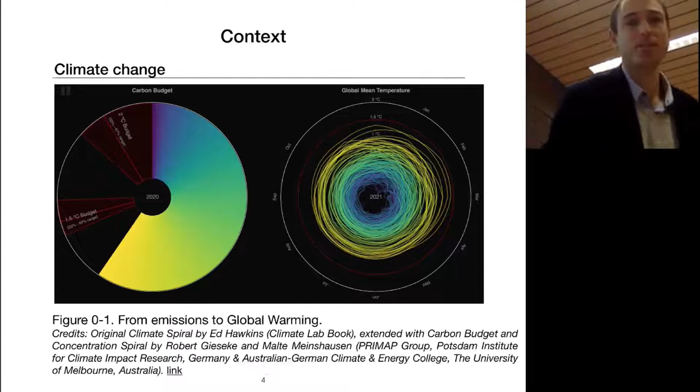So let's first start with the context, and I would like to show you a very small animation. I think it speaks for itself.

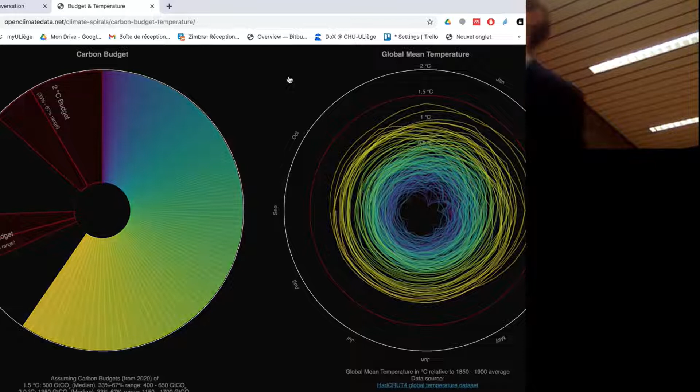On the right part, this is the global mean temperature on Earth. On the left part, it is a carbon budget, evolving across the last 150 years. We can see that across time the average temperature is increasing, and so of course the carbon budget too. Here we are in 2021, and we are this distance from the 1.5 degree carbon budget. At this rate, if we follow the emissions actually produced by all human activity, it should be reached in 10 years if we do nothing. But of course we are doing everything we can to try to decrease CO2 emissions. I think it speaks for itself that on average the temperature is increasing, and I think you already all know that.

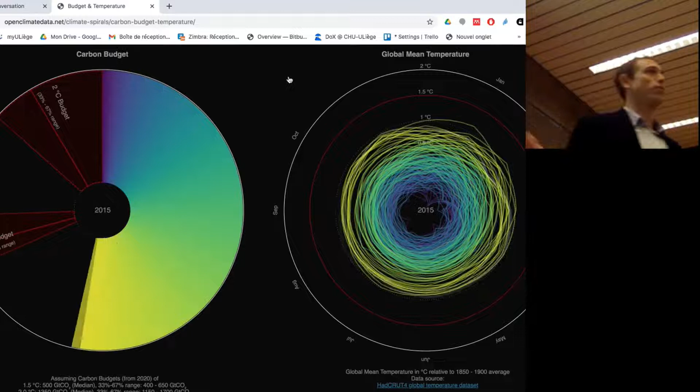Let's come back to the presentation. The world consumption of primary energy is mainly composed of fossil energy, around 84% in 2019 composed of oil, gas, and coal. This is an incredible source of energy, because with it we can achieve so many things. Without fossil energy we could never have achieved planes, informatics, and so much other technology we use today. So they are beautiful sources of energy, but they emit CO2 emissions, so we have to find something else.

So we are trying to help renewables penetrate into power systems. Right now they amount to 5% of total world energy consumption. So we need a lot of work to increase the share of renewables and decrease the share of fossil energy, even if it is beautiful energy, but it emits CO2 emissions.

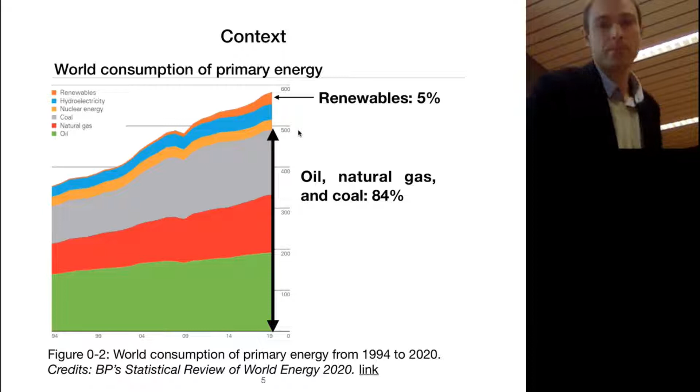So this thesis takes place in that context. You can find in many sources of information some mitigation scenarios, and this one is proposed by the International Energy Agency, which proposes several mitigation measures to try to reduce greenhouse gas emissions. Two pillars are of particular interest for me.

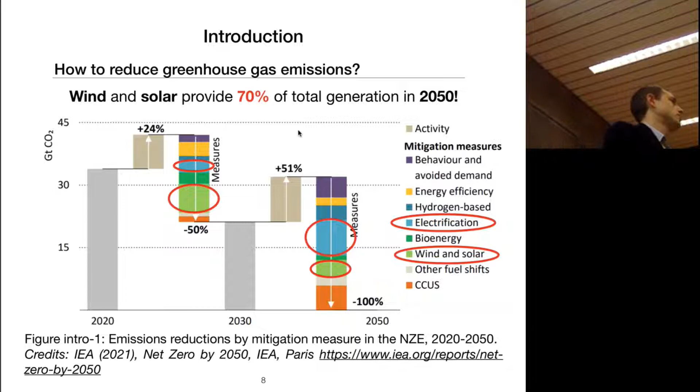These are first the electrification and second renewable energy, wind and solar. In the net zero emission report, you can see that they account for an important share of the mitigation measures, because these two pillars represent almost 40% of the decrease in CO2 emissions by 2050. In this thesis, I focus on these two pillars, so they are quite important in this report.

But there is something which is not easy: renewable energy is uncertain. It depends on the weather, and the weather is uncertain by nature. This is why we are studying renewable energy in power systems. It represents a great challenge, because we have to ensure at all times the equation between production and consumption. But renewable energy is uncertain by nature, so how can we ensure the balance between production and consumption if we do not know in advance the production of renewable energies? This is one of the great challenges we have to face.

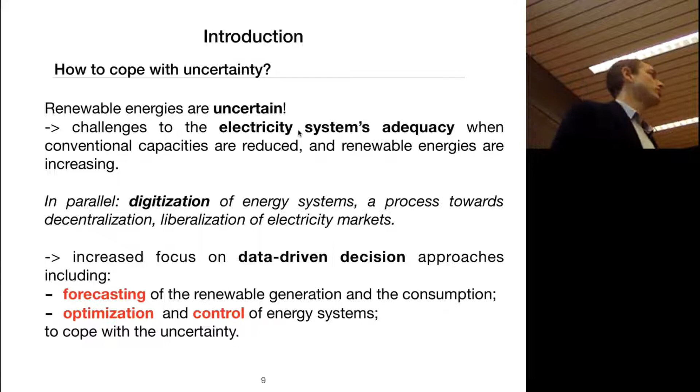In parallel, in recent years we have observed digitization of the energy system, a process toward decentralization, and so on. There has been an increased focus on data-driven decision approaches, including forecasting, optimization, and control of energy systems. These two techniques, forecasting and optimization, we would like them to cope with the uncertainty of renewable energy. Many people have studied these two approaches, and this was in fact the input of my thesis: to try to bring a little improvement into the forecasting topic and into optimization and control, to help cope with the uncertainty of renewable energy.

So forecasting is a natural step for decision making. In our daily life, we all use forecasting, for instance the weather, because every day we look at the weather forecast to know how tomorrow, in 2 days, or in 3 days the weather will be, because it impacts our daily life. It's the same thing for renewable energies. We need some forecast to try to make a good guess of what the renewable production will be tomorrow, in 1 week, or in 1 month.

The key parameters to forecast in power systems are renewable energy production, but also the consumption. Consumption also depends on the weather - of course in winter we need more heat than in summer, and in southern countries it's the opposite because it's hotter, so sometimes we need to cool the system, because otherwise we cannot live.

But also the prices. Prices are of particular interest for some key actor players, for instance the energy retailer. Right now, you all know there has been a great soaring in electricity and gas prices, and it is a nightmare to try to forecast this price right now.

On the second pillar, optimization and management, depending on the application you could consider several techniques. If, for instance, you focus on short-term horizons, from a few hours to a few days ahead, these applications concern control, dispatch, and unit commitment. But if you are, for instance, a policymaker, maybe you are more interested in system planning or expansion planning, where the horizon is more 1 year, 2 years, or sometimes decades.

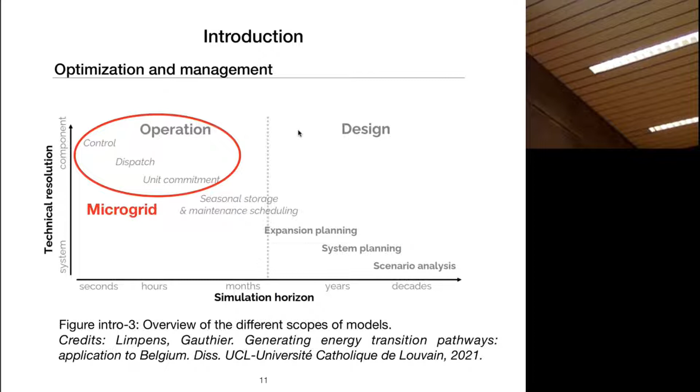Depending on the system size, it is also not the same technique that you will use to optimize the system. A grid at the country scale is completely different than a microgrid, or sometimes only a battery or a PV plant. So depending on the size of the system and also the horizon, you will select a different type of optimization strategy. In my thesis, I focus on the operation of microgrids for control, dispatch, and day-ahead planning - more like unit commitment, but in between dispatch and unit commitment. I try to propose some techniques to help optimize the system to cope with uncertainty.

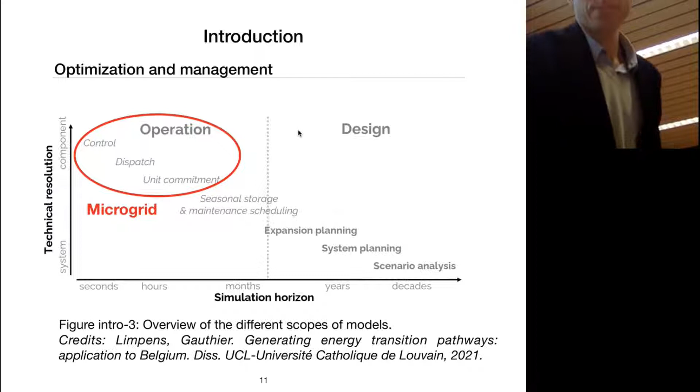A microgrid is an electrical system composed of generation - it could be conventional generation such as a diesel generator, but also renewable energy, PV, wind power, hydraulic, and so on - but also a storage system and consumption. It can also be composed of different vectors of energy, for instance gas, so we could imagine consumption of gas or production based on gas and so on. But in my thesis, I focus on electrical microgrids.

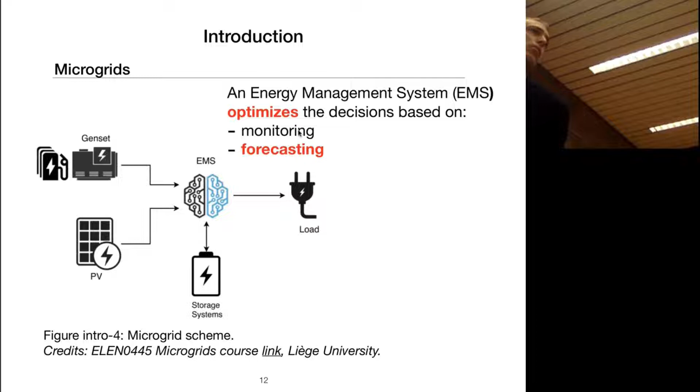At the center you have this brain, which is the energy management system, and it tries to optimize the decisions of the microgrid based on monitoring and forecasting. So it's very important to try to produce reliable forecasts of all the key variables as input to the decision-making problem, and this is what I try to do in this thesis.

So you can guess that my two main research questions are about forecasting and decision-making. The first one is how to produce reliable probabilistic forecasts of the key parameters. The second one is how to make decisions with this forecast under uncertainty, how we can cope with the uncertainty of renewable generation, consumption, or electricity prices, and try to propose an optimal strategy to manage this microgrid.

In this thesis, I made several simplifications because in reality the models are very complex. First, I consider microgrids composed only of a few nodes, so very small microgrids with only a few generation, storage, or consumption devices, not microgrids composed of 400 or 1000 nodes. So I study very small microgrids, and I did not consider the power flows.

I can explain that a little bit later if you want. I consider a static and linear model for the battery, so I did not consider a non-linear model, or the degradation of some components of the battery or the PV plant and so on. And the day-ahead planning that I consider is composed of 24 hours. I did not consider planning over one month or two weeks, for instance.

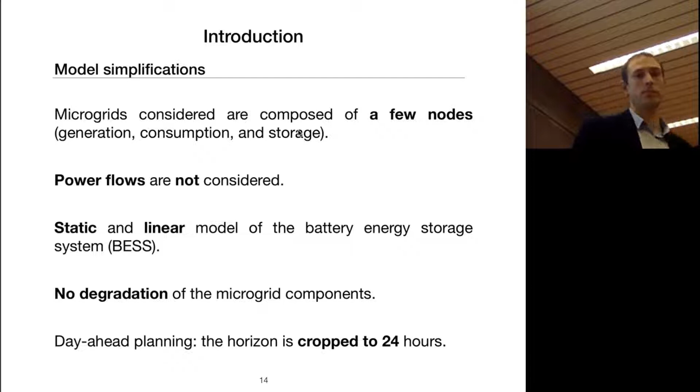In my opinion, it's very important to distinguish the forecast quality and the forecast value, because, as you will see just after, it is how I divided my thesis work. The forecast quality corresponds to the ability of a forecasting model to mimic the characteristics of the stochastic process, and it can be assessed using some metrics. For instance, if you consider point forecasts, the mean absolute error or the root mean square error, and so on.

And you have the forecast value. The forecast value relates to using this forecast in a decision-making model. So you are trying to assess how much, in terms of euros, it will help you for this system, or maybe in terms of services, if you consider for instance ancillary services for the TSO and so on. These two are different, even if you expect that if you have a good forecast quality it should help you achieve a good value. But it is not always the case.

That's why we have, in my opinion, to study both of them. So in my thesis I studied the forecast quality and the forecast value, and that's why the work is divided into two parts.

The first part is on forecasting, where I consider different forecasting models. For instance, generative models that can produce scenarios, but also quantiles, density forecasts, and so on from other forecasting models. And I try to evaluate the quality based on some metrics.

In the second part of the thesis, I focus more on the value evaluation of these techniques, where I consider several case studies. In these case studies, if you use scenarios, maybe you will use a stochastic planner to compute optimal bids. But if you consider quantiles, for instance, it can be the inputs of a robust planner. So depending on the forecast, you will not use the same optimization strategy.

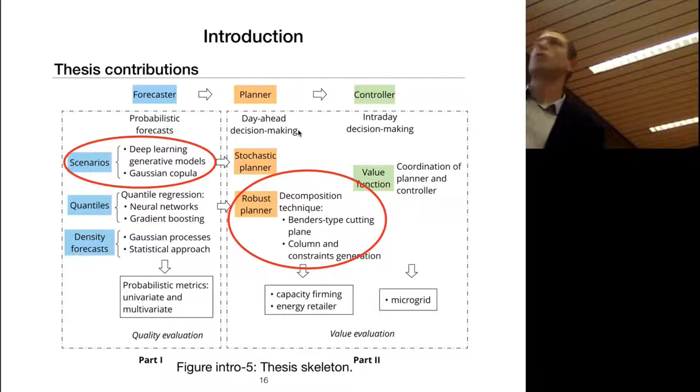For this presentation, I will focus only on two subparts of the first part and the second part. In the first part, I will focus on deep learning generative models. In the second part, I will focus on a robust planner that uses quantiles to define a kind of PV uncertainty set, which will be used as inputs of a robust planner. So this will compose the two parts of my presentation.

Okay, so let's focus on the first part.

This first part studies a recent deep learning technique that has been used in computer vision applications and so on, but was not really introduced into power systems: normalizing flow. We compare this deep learning generative model to state-of-the-art generative models, generative adversarial networks, and variational autoencoders.

We implemented this model in the conditional form by using the weather forecast, and we used the open dataset of the Global Energy Forecasting Competition 2014, where there are three tracks: PV, wind power, and load tracks.

As you will see, on average the normalizing flow tends to be more accurate, both in quality and in value. This work has been published, and it was a great work because I worked with several other people who helped me a lot to understand this model. They are here: Antoine, Damien, Bertrand, and Anthony.

And the Python code is available, so if you want to reproduce the experiments, please use it, and you can provide me some feedback.

The motivation of the study was that, in fact, only one study considered this technique, but it only compared normalizing flow on the generation of daily load profiles, and it did not study the weather forecast. So it was quite a good study, but we wanted to know a little bit more if normalizing flow can really perform for PV generation or for wind power, and in terms of value, what is the value of this forecast.

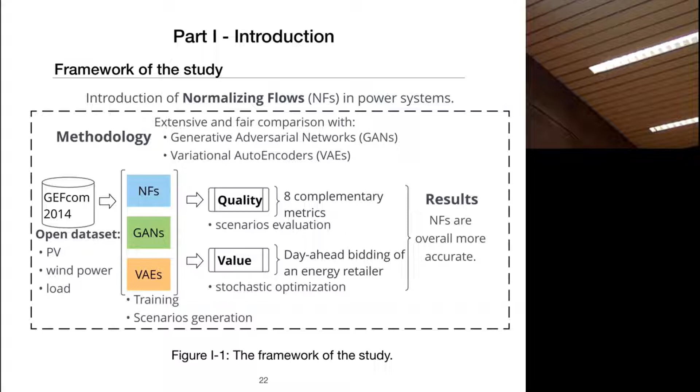So we used an open dataset with 3 tracks: PV, wind power, and load. We have 3 generative models: normalizing flow, generative adversarial networks, and variational autoencoders. They produce scenarios for each track of the dataset. Then we assess the quality using 8 complementary metrics, and also the value by considering the day-ahead bidding of an energy retailer.

So at the end, as you will see, normalizing flow tends to be a little bit more accurate. But the take-home message is not that it's the best technique in the world—no, not at all. It's just that normalizing flow has potential, and so it also has potential in power systems. Maybe you can use them in your own application, and maybe it will help you. That was the take-home message of this study.

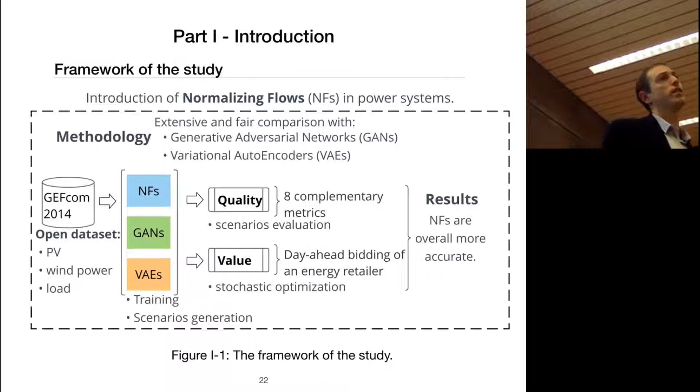I will not go into detail of the mathematical formulation, just a quick high-level comparison of the 3 models. So normalizing flow tends to build a bijection between the variable of interest—so PV generation, wind power, and so on—and a well-known stochastic distribution, for instance a normal law.

And you can train the model by performing maximization of log likelihood, which is rarely the case when you consider generative models. So it has some advantages, and we can discuss that a little bit more if you want. Then once it's trained, you can take the inverse, and it will generate scenarios.

Concerning the generative adversarial network, it's a completely different training process, because on one part you have a discriminator, and on the other part you have a generator. The generator tries to sample scenarios to fool the discriminator between observation and scenario, and the discriminator is trying to distinguish which one is a scenario and which one is an observation. It's like a competitive game, and the training is done like that. So at the end, you hope that your generator is good enough to fool the discriminator.

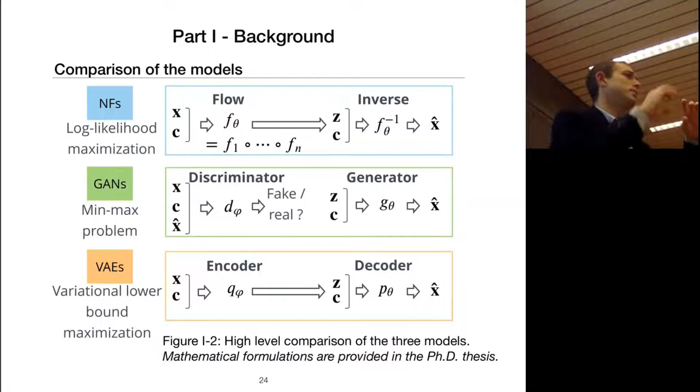When you consider the variational autoencoder, it's again another training process. Here we try to approximate the likelihood by maximizing the variational lower bound. It is composed of 2 parts: an encoder that encodes the variable of interest into a latent space, and then a decoder that, once the training has been done, is able, from the latent space, to produce a realistic scenario.

So we have 3 tracks, and for each track we divided the dataset into a training, a validation, and a testing set. The learning set is used to train the model, the validation set is used to select the relevant hyperparameters, and the testing set is used to generate the scenarios. These scenarios are used to conduct the quality and value evaluation.

Concerning the quality evaluation, we use 8 complementary metrics: the quantile score, the continuous ranked probability score, and the reliability diagram. They are all marginal and univariate metrics. But we also introduce 2 multivariate metrics, the energy score and the variogram score. We consider also another kind of metric, a classifier-based metric. We can discuss that a little bit later if you want.

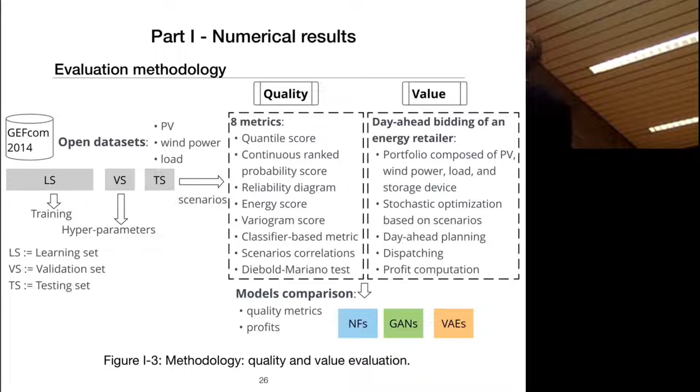We also study the correlation of scenarios, and we use a statistical test on the quantile score, continuous ranked probability score, energy score, and variogram score, to assess if the differences were statistically consistent.

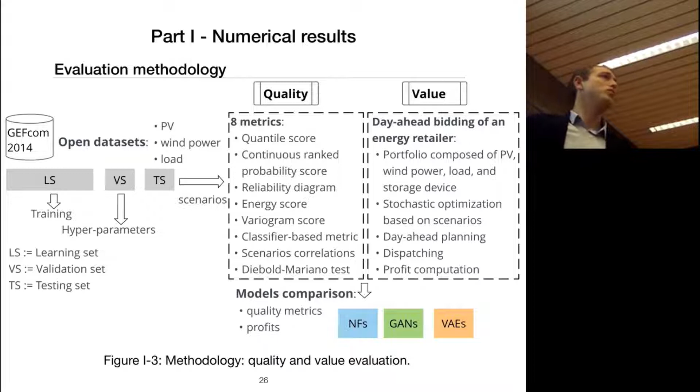Concerning the value evaluation, we consider the day-ahead bidding of an energy retailer, and the portfolio is composed of PV generation, wind power, load, and a storage system. We decided to conduct a stochastic optimization based on the scenarios of each model, and at the end we compare the profit generated by this stochastic planner.

The first time I saw it, I thought there was an error in the training. I didn't understand why the scenarios were like that, but it is like that. I investigated a little more, and they were still like that. So okay, maybe it's okay. I don't know, we will see.

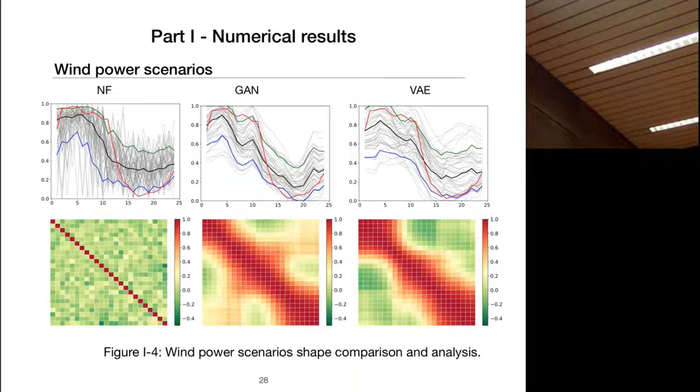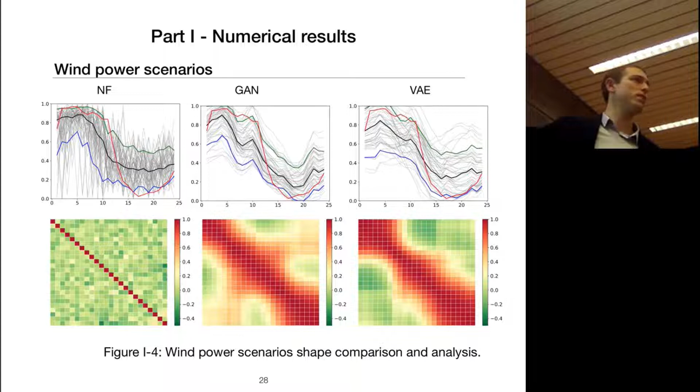When we computed the time correlation matrix, here you have 100 scenarios in gray. You can compute the correlation matrix for a given day, and you can see that they are completely not correlated with each other. It's really strange, because for the two other models there seems to be some correlation for a few time periods.

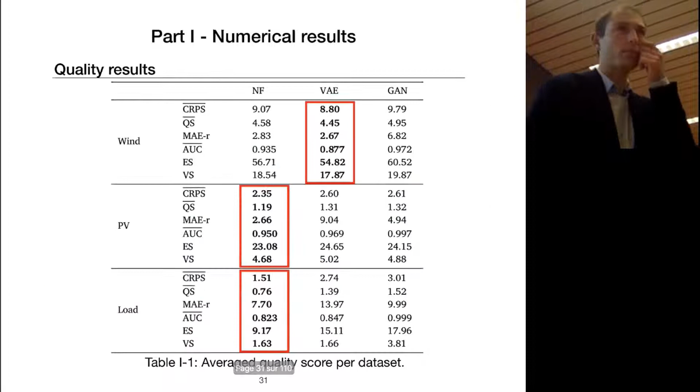Okay, so that was a visual inspection. Let's see if in terms of metrics we can see some differences. When we compute the metrics, for the wind track it is the variational autoencoder that achieves the best results, but it's followed closely by normalizing flow. For the two other tracks, the PV track and the load track, normalizing flow achieves the best results. So they have a completely different shape, but in terms of quality metrics, normalizing flow seems to be okay.

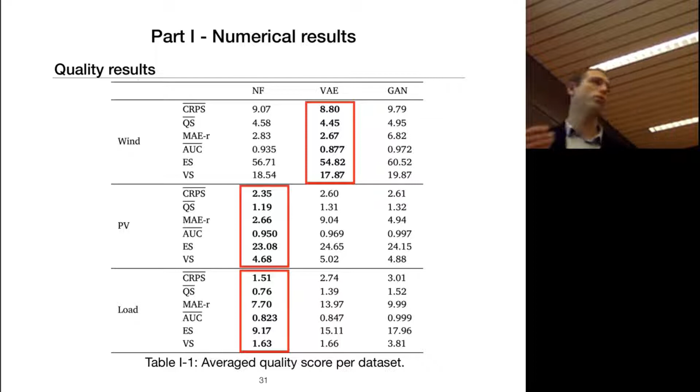So let's go further into the investigation and see if in terms of value it's the same trend or not. When you consider the value of bidding for an energy retailer, you can compute the net profit—the profit minus some penalty, because you need to balance your portfolio on the day-ahead market, and if you deviate from your bids in real time you have to pay a penalty to the TSO. We consider a stochastic formulation of this energy retailer, using scenarios computed by all three models.

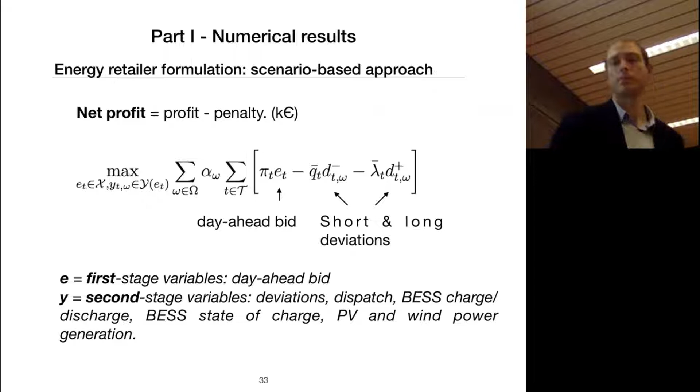Once we computed the net profit over the whole testing set, in terms of euros, we can see that normalizing flow achieves the best net profit compared to the two other models. So in the end we have a model, normalizing flow, that achieves quite good results in terms of quality but also in terms of value, even if the shape of the scenarios is completely different.

Now, if we consider some other criteria, you could also look at training and sampling speed, but for this model it is true that normalizing flow took longer to train and to sample scenarios. So if it's very important for you to have a very fast technique to sample and train, maybe you will not consider normalizing flow.

But in terms of quality or value, they are quite good, and if you consider hyperparameter search or sensitivity, normalizing flow tends to be okay—by just testing a few values manually, I found a quite good set of hyperparameter values. For the GAN, it was much more difficult to find relevant hyperparameters. I spent much more time because the training process is much more unstable.

However, in terms of implementation, if you implement this model from scratch, variational autoencoder is quite easy. There are some libraries for normalizing flow, but if you begin from scratch, I would say that for a forecasting practitioner who is not an expert in deep learning, normalizing flow is a little more difficult. So as a conclusion of this first part, I would say that normalizing flow can challenge GANs and VAEs.

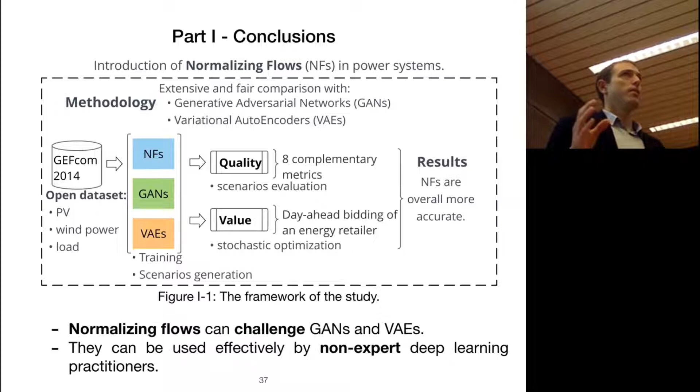However, it's not easy to implement them, so you need maybe a library to start to play with them. There exists some library, and for instance, Antoine Wehenkel has implemented normalizing flow, so you can access it freely on GitHub. In my opinion, they can be used effectively by non-expert deep learning practitioners. And the shape of the scenario is quite interesting in comparison with the two other models, and they provided quite good results in terms of quality and value.

But there are some advantages of normalizing flow I did not consider into this study. The first one is that normalizing flow directly learns the stochastic process because it is able to maximize the log likelihood, which is not the case of the two other models. So we could imagine some application where we could take advantage of this particular feature of normalizing flow.

It could be also interesting to investigate the graphical version of normalizing flow, so graphical normalizing flow, because maybe they could take advantage of the spatial dependencies between some PV plants or wind power plants and so on. In my opinion, they have not been really studied also into power systems. So it could be also an interesting way to extend this study. And at the end, there are other generative models that seem to be quite interesting in computer vision.

That could be extended and implemented in power systems, and so, for instance, the diffusion models. So it could be nice to have now a study that could compare GAN, VAE, normalizing flow and diffusion model, and maybe to conduct also an extensive quality and value evaluation of all of these four models.

Okay, so this was the conclusion of the first part. We are right now at the middle of the presentation in terms of timing, so we can focus on the second part.

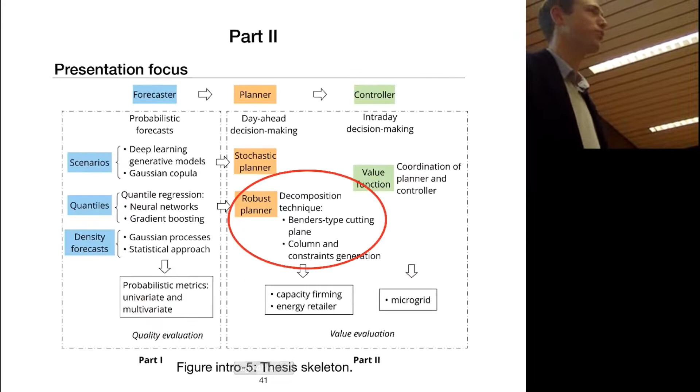So the second part is more about robust optimization and how to use some forecasts into an optimization problem. It focuses on a grid-connected renewable generation plant with a battery energy storage system that is used in the capacity firming market. And we use a min-max-min robust optimization strategy to try to compute relevant day-ahead bids of this plant. As you will see, this problem is not so easy to solve because it is a min-max-min problem.

So you cannot just use a solver and say, okay, solve me that, please. So we use two decomposition strategies to try to address this problem. This study was also published, and the Python code is in open access, so you can use it. And if you have some feedback, do not hesitate, because it will help to improve the result. For instance, the column and constraint generation algorithm was suggested by one of the reviewers of the paper.

So to the other PhD candidates, I would say try to discuss with people and try to submit the paper, because this is where you can have some very relevant feedback to try to improve your work.

About the capacity firming framework, just to be sure that we are all talking about the same thing: it is an energy market that is mainly designed for islands, so for instance, the French islands, but it can be also for isolated markets. You can consider a grid-connected PV plant, but it could be also a wind power plant or hydro plant. And you couple this system with a battery, because you need the battery, in fact, to try to take advantage of the production that is uncertain, and because during peak hours, you are more remunerated.

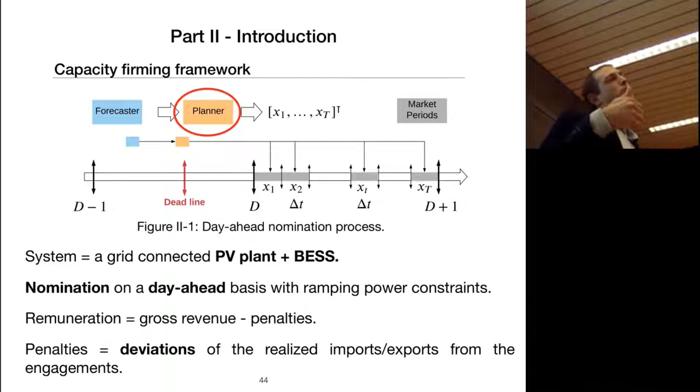So you have to nominate your export to the grid on a day-ahead basis, and in real time, if you deviate from the day-ahead list, you will be penalized. So you have to comply with the contract, in fact. So you try to maximize your revenue, which is the gross revenue minus the penalty, but you would like to minimize the penalty. And the penalty, depending on the framework, can be quite high.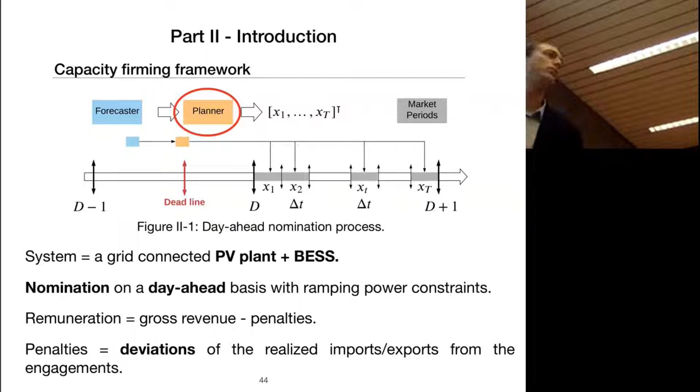So this is why we decided to use a robust strategy to design day-ahead bids that are robust to that and that could maybe try to minimize the penalty. So there are several strategies to solve this kind of problem, and we decided to focus on robust optimization.

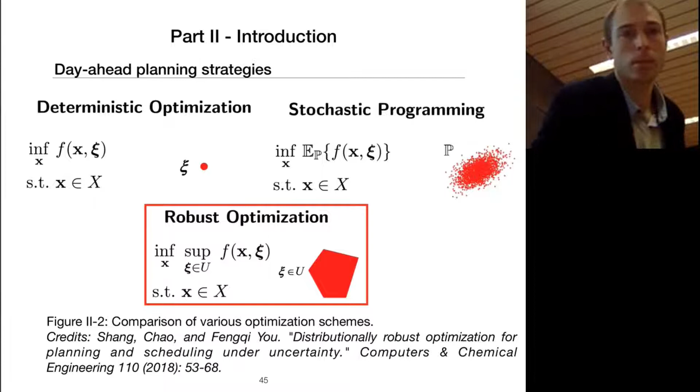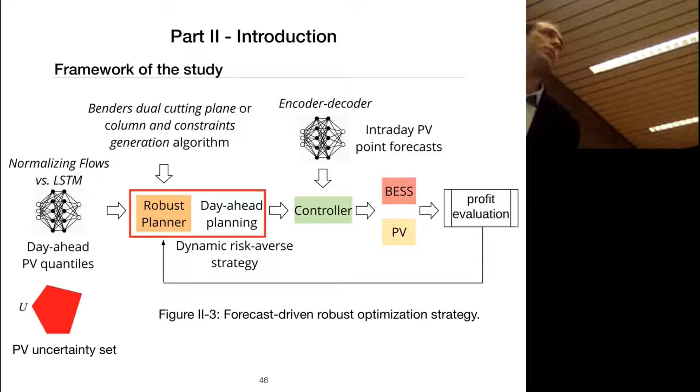This controller tries, in real time, to minimize the deviation from the bid. At the end, we can compare between observation and the control action, the deviation, and we can compute the profit. We also investigate a dynamic strategy to try to optimize the hyperparameter of the robust optimization problem, as we will see a little bit later.

Let's just first focus on the deterministic formulation, and then we will derive the robust approach.

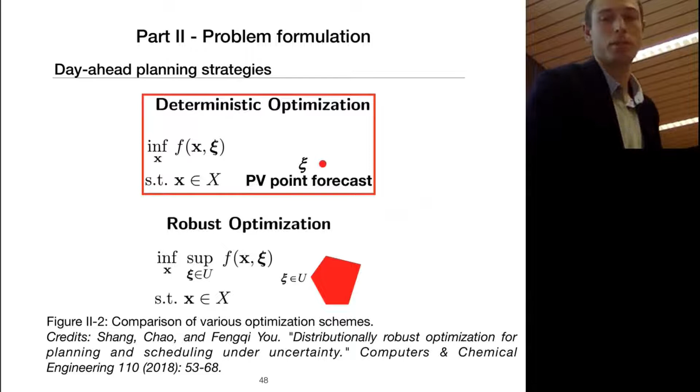So the goal is to minimize, to maximize the net revenue, so to minimize the opposite of the net revenue. There is a gross revenue, which is in fact the export times the selling price, and the penalties. The penalties are when we deviate from the bid, and we would like to minimize the penalty and maximize the gross revenue. Here in this framework, I've studied a linear, convex, piecewise linear penalty, but it could be something else, something quadratic or whatever you choose.

But here in this framework, it is linear, and so the overall problem is a mixed integer linear program, so we can solve it quite easily. We use PV point forecast as input of this deterministic problem, and then we have the bids, and we use the controller to try to minimize the deviation between the engagement and the observation.

Now, if we consider the robust optimization, it's completely different, because we do not have PV point forecast, we consider a PV uncertainty set. We say that the PV generation is somewhere within this PV uncertainty set, and we would like to find the worst PV trajectory within this uncertainty set to try to compute the most robust and reliable day-ahead bids.

So I consider a PV interval to define the PV uncertainty set, so at the end it is a polyhedron. But these intervals are composed with PV quantiles, so you have lower and upper bounds that are defined by a PV quantile, and so they are marginal prediction intervals. I did not consider a multivariate prediction interval, so we can discuss that also a little bit later if you want.

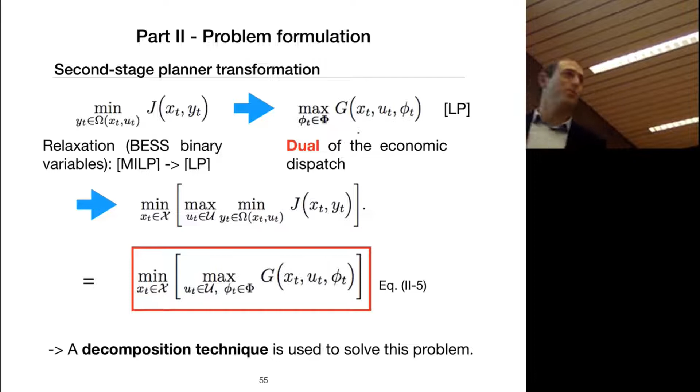So we have a max, and so the min max min will become a min max max, or a min max. At the end, we have only a min max problem, which is easier to solve than a min max min problem. But still, we cannot solve this problem directly, so we need a decomposition technique to solve it, and we will see that a little bit later.

So we have this min max problem, and the idea is to decompose the problem between a master problem that will focus on the first stage variable, so the first min, and we have a sub-problem that will focus on the inner problem, the worst case dispatch problem.

So this sub-problem will consider a fixed engagement and it will try to find a solution, and it will provide the dispatch variable to the master problem, and so on. So it will iterate between the master and sub-problem.

And there are several algorithms that can do that. We decided to use a Benders dual cutting plane algorithm the first time. Then one of the reviewers suggested that maybe it could be interesting to have a look at the column and constraint generation algorithm, and it was quite interesting, in fact, to compare both of them.

So for the first one, the key idea is to iterate between the master and the sub-problem, but the key idea is, in fact, to build some cuts, so to add some constraints to the master problem. We are trying to approximate the objective value of the master problem by building some cuts.

So for each iteration, the sub-problem is solved. For a given engagement, we solve the sub-problem and it will provide some cuts to the master problem. And Benders has demonstrated that we can converge to an optimal value.

And so we implemented this technique by also using an initial set of cuts, but we can discuss that a little bit later if you want.

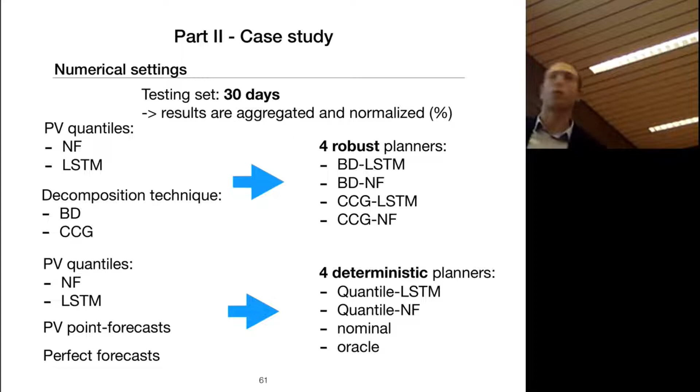But we also use as benchmark the deterministic planner, so you can just use the PV quantiles and then use the deterministic formulation, so you have 2 deterministic planners. You can use PV point forecast, so it's the third one, and you can use perfect forecast, so this is the oracle. And we normalize the result of all the planners by the result of the oracle.

So as I previously said, gamma and Q control the risk aversion, and we may have different strategies to set this parameter. The first one is just to consider gamma and Q fixed for all the days of the data set, and we perform a sensitivity analysis to try to identify the optimal pair.

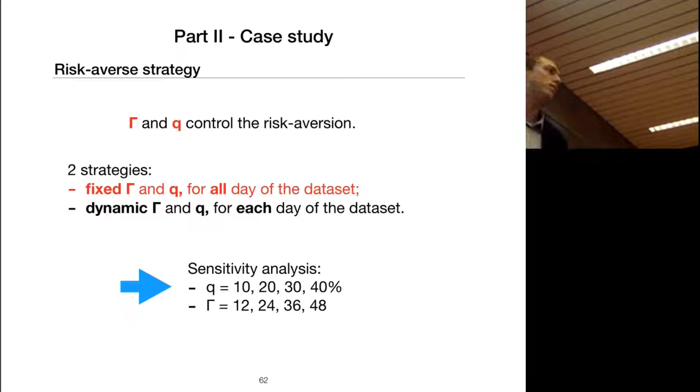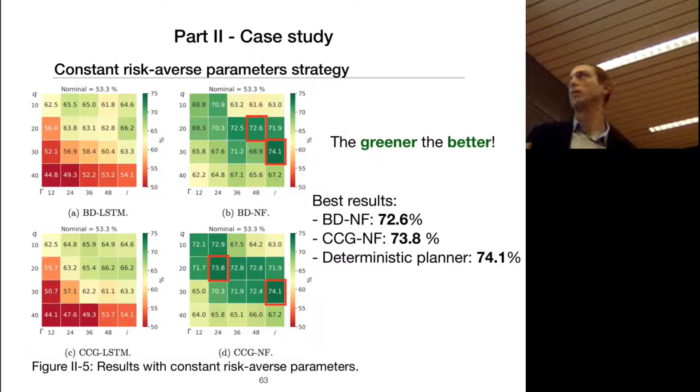So the results tend to be better for almost all pairs of risk averse parameter. And then if we compare the two of them, we can see that the CCG algorithm performs a little bit better than the Benders dual cutting plane algorithm.

However, the deterministic planner using PV quantile is quite good also. So we could say, okay, it's great to use a decomposition algorithm, but at the end, the deterministic planner is okay. Yes, but we didn't know that before, and you still need to identify the relevant quantiles for the deterministic planner. So you do not know that also in advance.

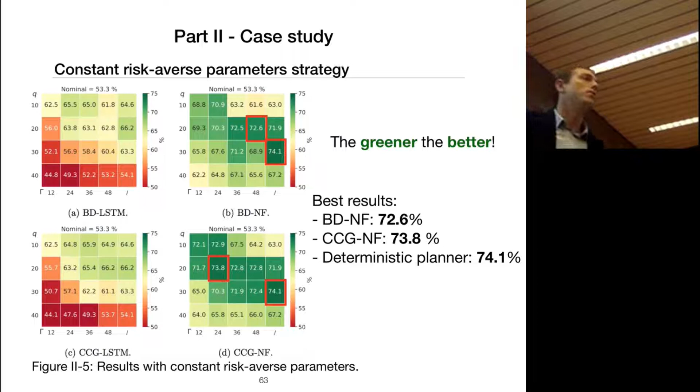But we can do something a little bit smarter than just fixing in advance the uncertainty budget and the PV quantile. We can use a dynamic strategy where we try to adapt this parameter for each day of the data set. Based on a set of rules detailed in the PhD thesis, we are now considering different values for each day of the data set.

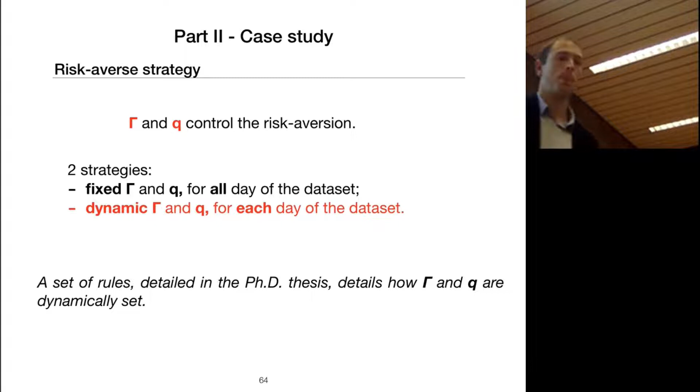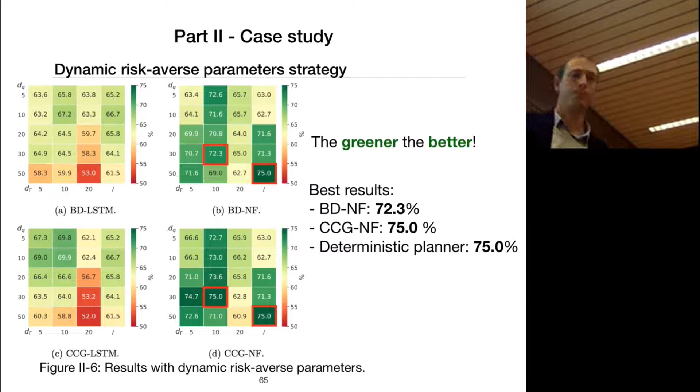So we consider an integrated approach where we have some forecasters that provide PV quantiles that are used to define the PV uncertainty set, which is then used as an input of a robust planner. This robust planner solves the optimization problem by using a decomposition algorithm.

Then the day-ahead bids are provided to a controller that will compute set points in real time by using PV intraday point forecast. And so at the end, we have a dynamic risk averse strategy that will try, for each day, to adapt the hyperparameter of the robust strategy.

And so the robust approach allows finding a trade-off between conservative and risk-seeking policy. However, it completely depends on your risk aversion impact. But the dynamic risk averse strategy improved the results a little bit.

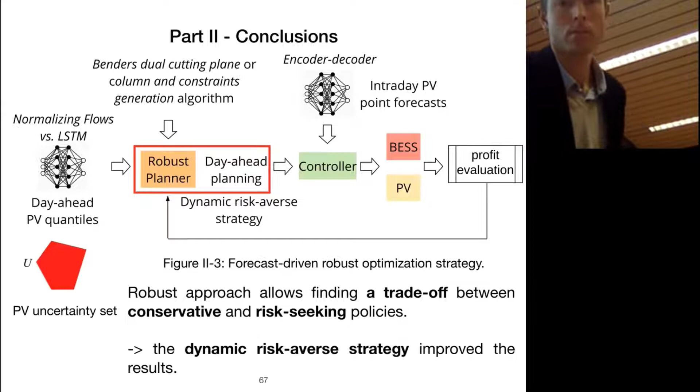However, there are still many works to do, and as suggested by Ricardo—so thank you, Ricardo—who pointed me out some directions, we could consider different representations of the uncertainty set. So I considered marginal prediction intervals, but we could consider simultaneous prediction intervals instead of marginal ones.

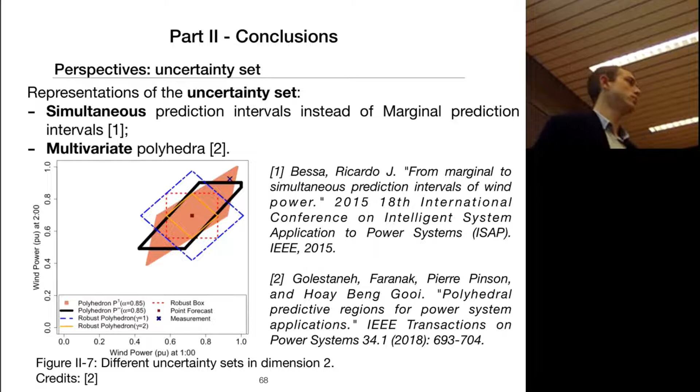But also multivariate polyhedra. And so here on this figure, we have in blue the robust polyhedron. So this is the one I use, but we could define other PV uncertainty sets which are better centered or better shaped around the measurement. So there is still a lot of work to do, maybe to improve this strategy.

We could also design an improved dynamic risk averse strategy. We could use a machine learning tool. Imagine that this machine learning tool could tell you, based on some information, for instance a forecast, to use this value of gamma or use this quantile. It could be much better than just relying on a set of rules.

We could also use a completely different optimization strategy, because I used a robust approach. And as suggested also by Ricardo, we could use stochastic programming. In stochastic programming, you have the first formulation that is risk neutral when you consider the maximization of the expected value, if you only consider this part with k equals to 0.

But you could also include risk management by including, for instance, a metric such as the conditional value at risk. And so this formulation also allows finding a trade-off between a risky approach and a neutral risk approach.

But we could also use chance constraint optimization, and then we could make a proper comparison of the robust approach, the stochastic programming, and the chance constraint optimization approaches. And for all approaches, we could use scenarios from the deep learning generative model as inputs.

And at the end, we could extend this case study by considering an entire energy community, because here I only consider one microgrid, but we could consider on this island several microgrids that are connected. So maybe it will be interesting to consider the power flow, nonlinear model of battery, or component degradation and so on. Then the optimization problem will be much more complex, so we would need other optimization strategies to solve it. For instance, we could try to decompose the problem by using other decomposition techniques and so on.